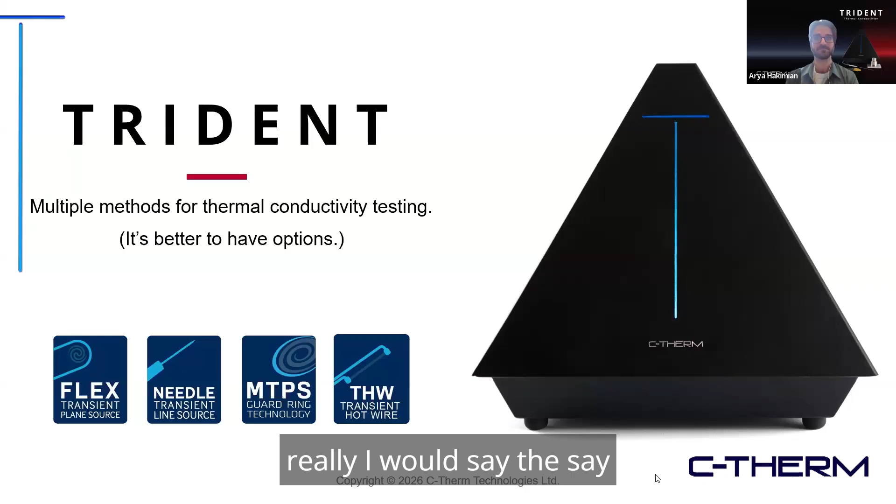Today's webinar is more focused on the TMA aspect, which we also support, but our core is centered around thermal conductivity. If thermal conductivity is also of interest, wanted to let you know about our Trident instrument. This is a modular system which brings together 4 different methods for thermal conductivity characterization. The idea is, being more flexible, being able to pivot into a different method or sensor type based on your materials or application really gives you the highest chance of success at getting good quality data. The idea behind Trident, and a bit of the inspiration, comes from this famous quote from Abraham Maslow: when all you have is a hammer, everything looks like a nail. So again, with Trident, it gives you more of a toolbox approach to really pivot and tackle using the most appropriate method given your specific task at hand.

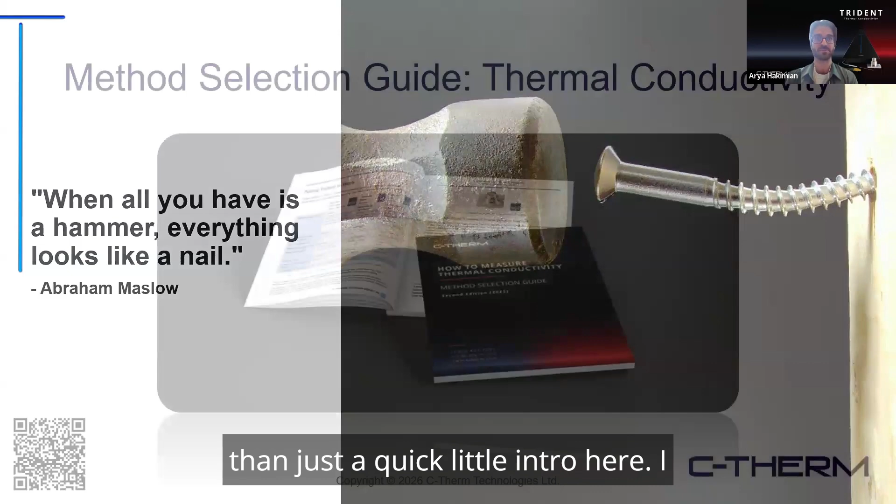So again, we won't be focusing much on thermal conductivity here today, other than just a quick intro. I'll just make reference to our method selection guide. This was recently published towards the end of last year. If you are interested in thermal conductivity and wanting to learn a little bit more about this space, this is a great free resource to check out. It compares a lot of the standard methods that exist out there in industry, as well as some of the more novel use cases and applications. So definitely feel free to check that out if thermal conductivity is also important to your research.

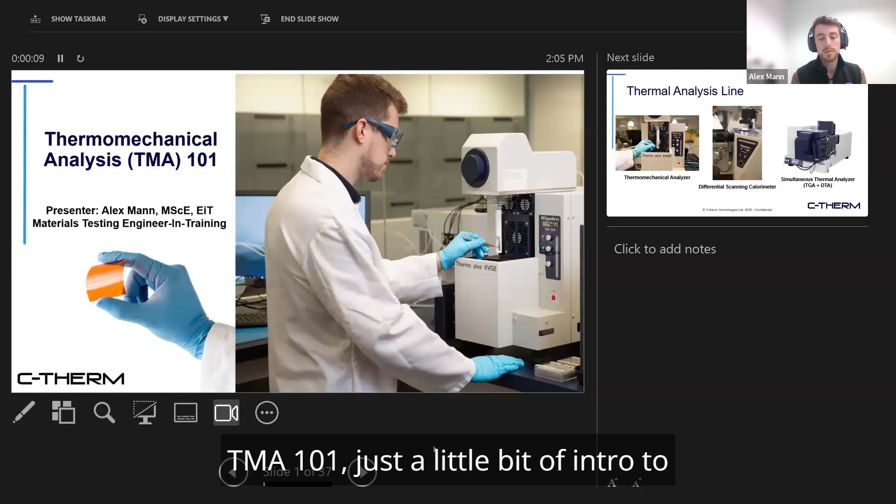So, as Arya previously mentioned, my name is Alex, and I'm going to be going over TMA 101. It's just a little bit of intro to TMA, about the instrument, the test, and what kind of data you can get from it. So, starting off, the TMA is part of a thermal analysis line, which is commonly associated with a DSC as well as the TGA or DTA.

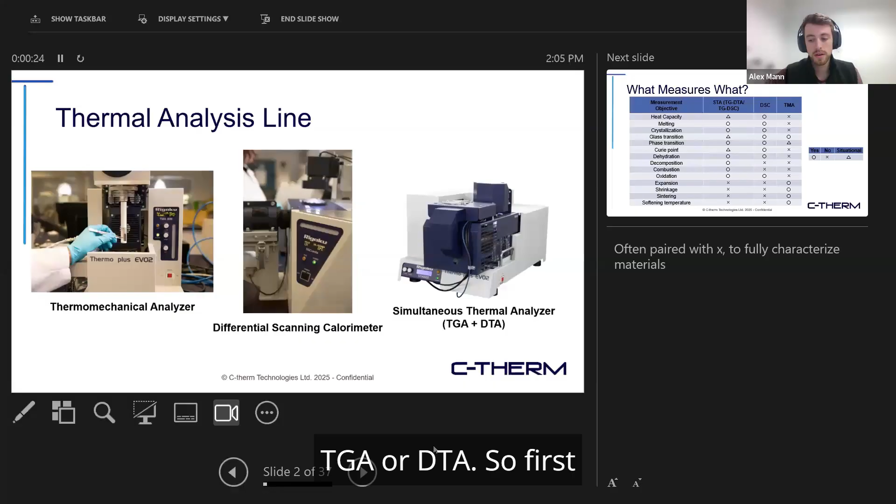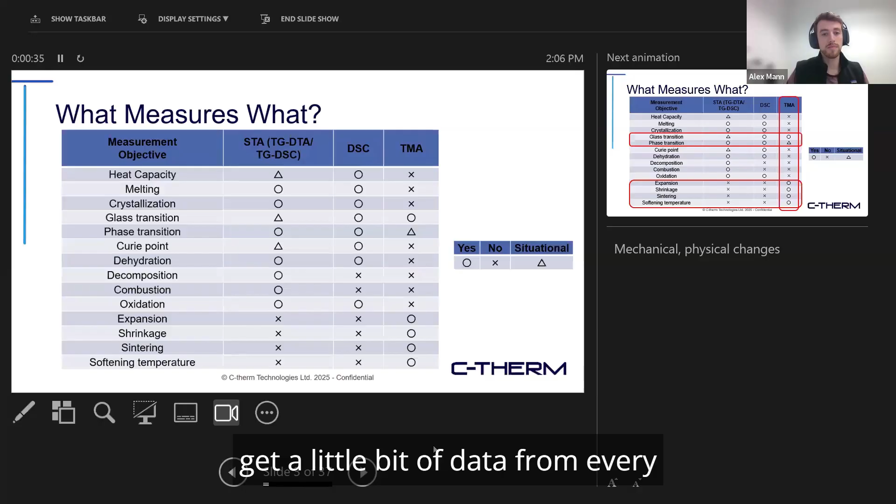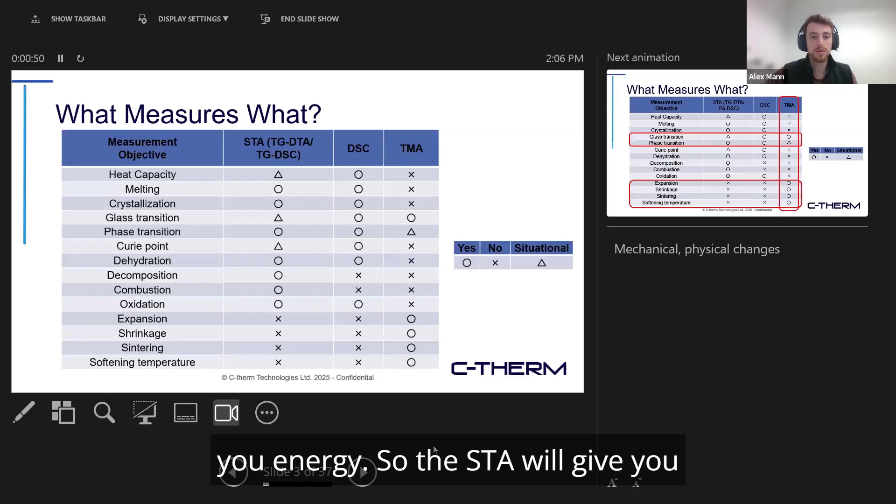So, first off, what measures what? All these instruments are complementary to each other. So if you really want to understand your material, it's great to get a little bit of data from every single one. Starting off, our STA, which is our simultaneous thermal analysis, that essentially combines a TGA, thermogravimetric analysis, as well as either DTA or DSC, which gives you energy. So the STA will give you mass loss and energy.

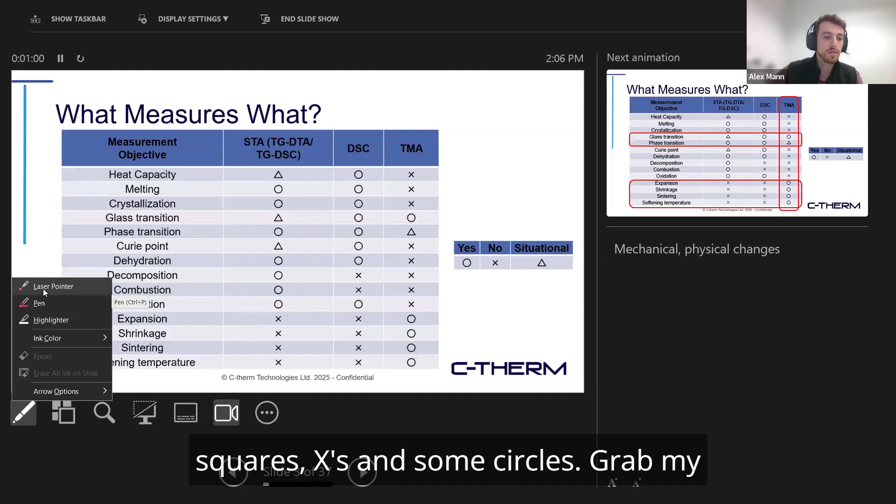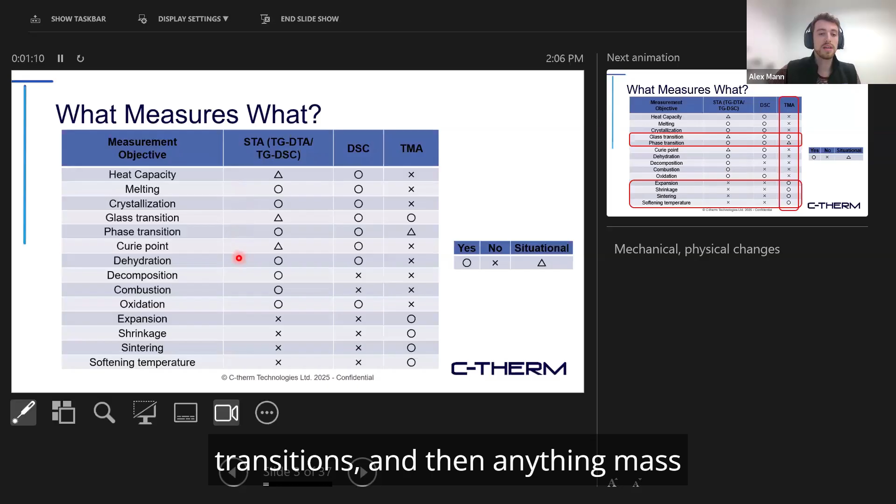So you can see here we have some triangles and some X's and some circles. Let me grab my laser pointer. We can go down a little bit. So the STA can be good for energy events such as melting, crystallization, any phase transitions, and then anything mass related, such as dehydration, decomposition, combustion, or oxidation.

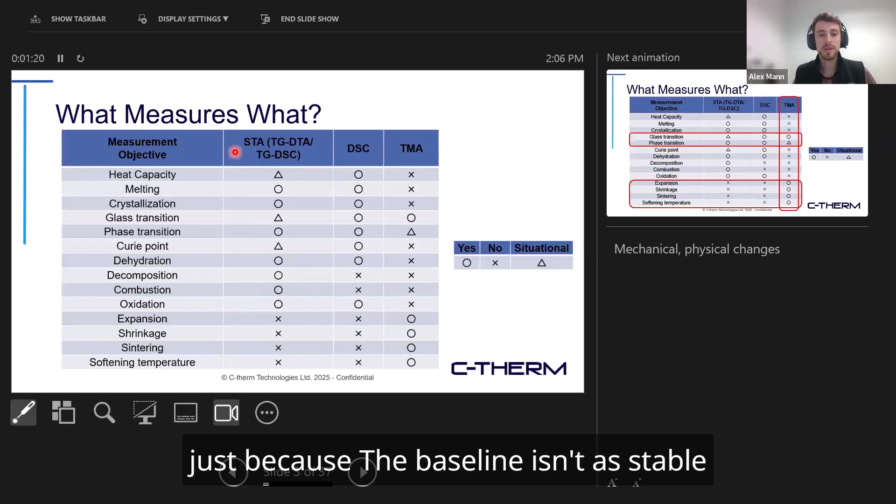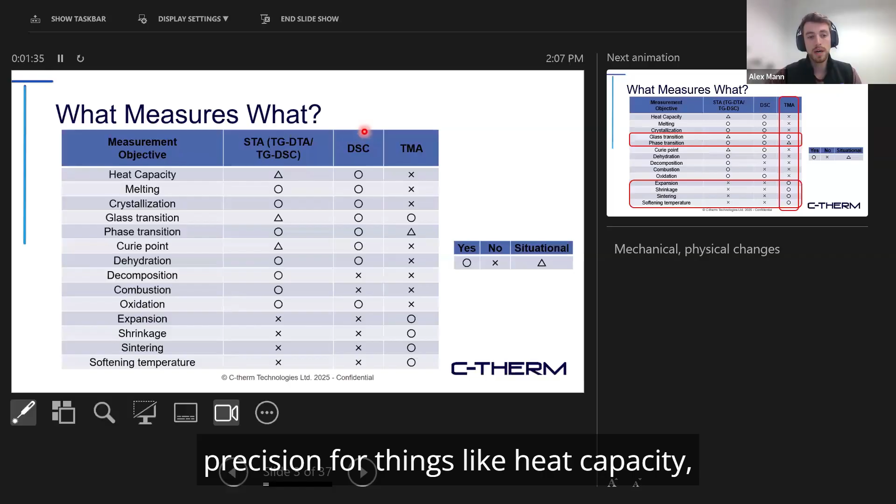Now, we do see some situational marks here, and that's just because the baseline isn't as stable as a true DSC. It's just the way that the furnace is built, and there's a lot more area in the furnace. There's not a stable floor in a TGA DSC, so that's why these are very situational. If you really need the exact energy precision for things like heat capacity, Curie point, and glass transition, then the DSC is much better for the job. This can do all of the above with the energy very well.

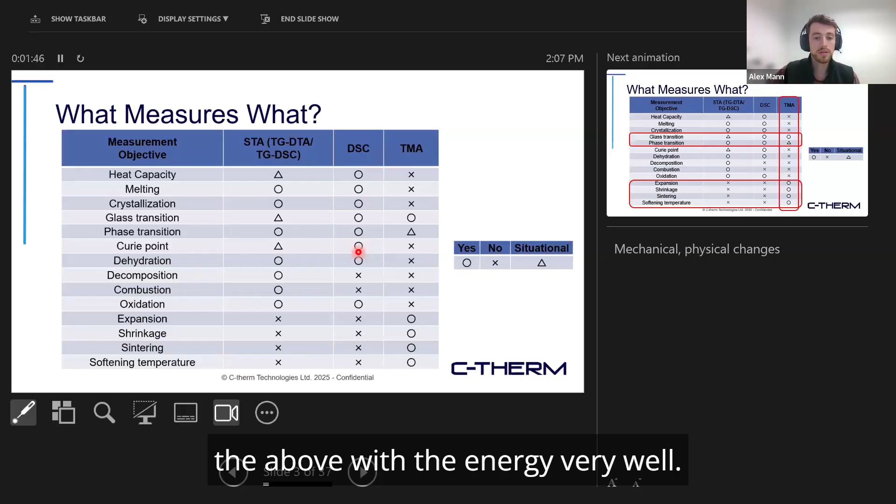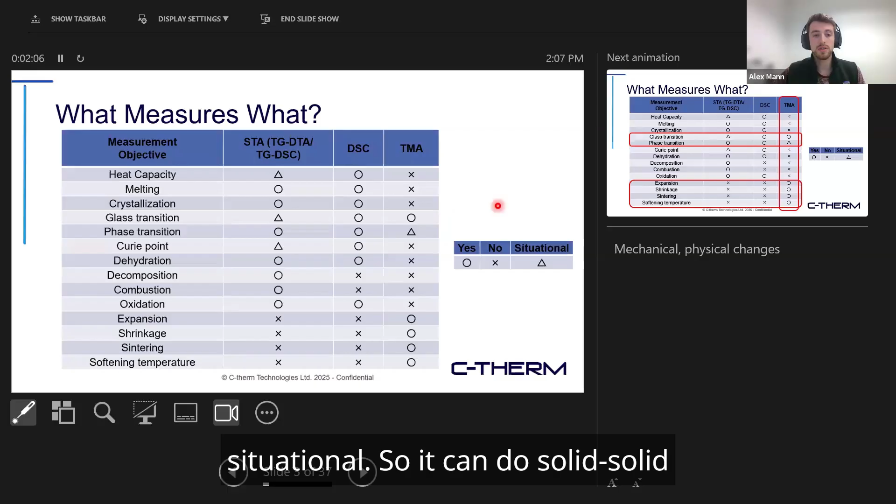And lastly, the TMA measures expansion. That can be from a glass transition. It can just be regular expansion, shrinkage, sintering, or softening. It is a mechanical, or physical property. And lastly, for the phase transition, there is a situational case. It can do solid-solid transitions, or if you're working with a compound such as a rubber, where a small percentage of it will go from liquid to solid, it can do that as well.

But it's not very useful. It's not meant to do full phase transitions such as liquid to solid or solid to gas.

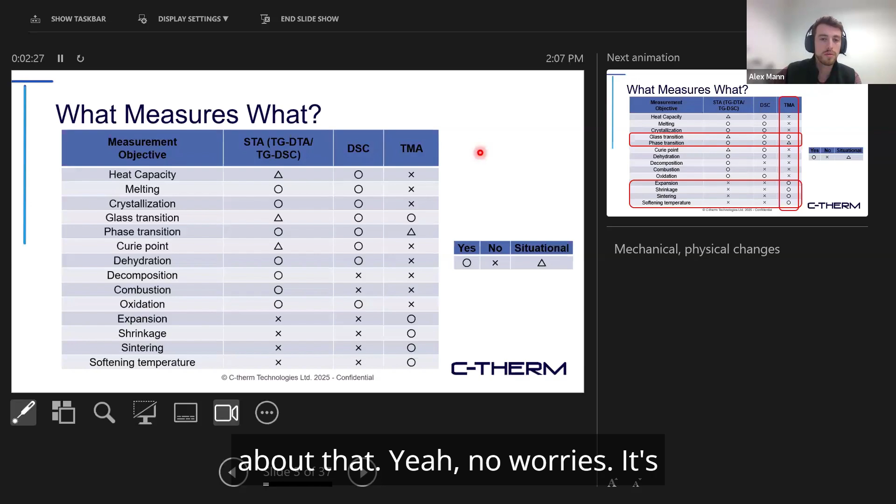Alex, sorry to interrupt there. I just want to flag you're in presenter mode, that's what's being shared. Just wanted to let you fix that. Oh, sorry about that. No worries, it's happened before and I'm sure it'll happen again. I'm gonna fix that real quick. All right, is that better? Looks good, thank you. Thank you for that, sorry about that everybody. Happens to the best of us. Technology, am I right?

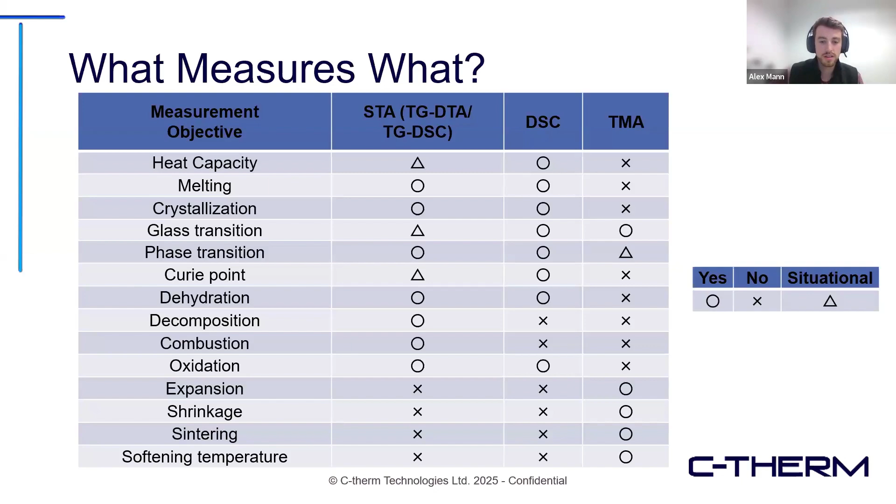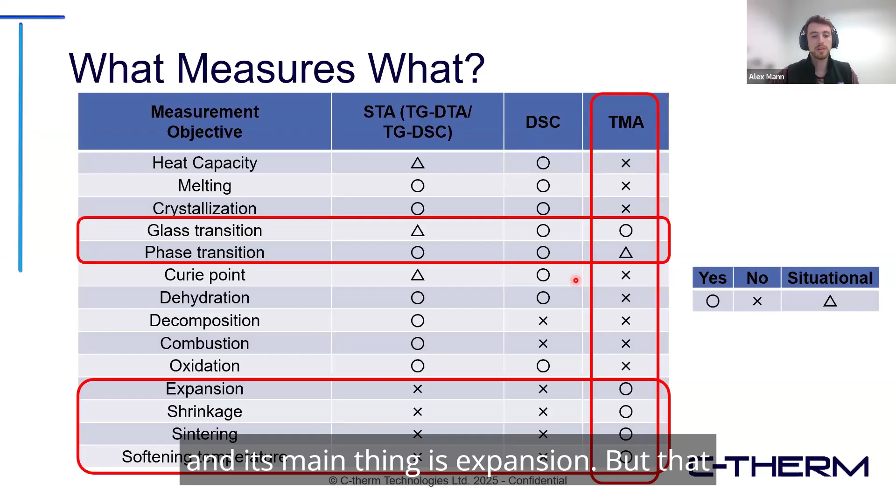All right, so TMA is good for glass transition, some phase transitions. Its main thing is expansion, but that also includes shrinking from sintering, and because it is a physical technique, it can also measure the softening temperature.

So I'm going to be going over CTE a lot, which is an acronym for coefficient of thermal expansion. I'd like to go over that real quick so we're on the same page. This is just a term we've come up with in order to describe how a material will expand or shrink over a temperature range.

So the units of CTE include micron per meter Celsius, parts per million per degree Celsius, or e to the negative 6 per degree Celsius. I personally choose ppm per degree Celsius because the rest are a bit of a mouthful.

Whenever we do our CTE, we need a reference point, because we're expanding from where? We need to define this. So as we can see here for our formula, our CTE is essentially our expansion as a percent divided by the change in temperature. So on an expansion chart, it'll look like this - it's going to be the slope, rise over run.

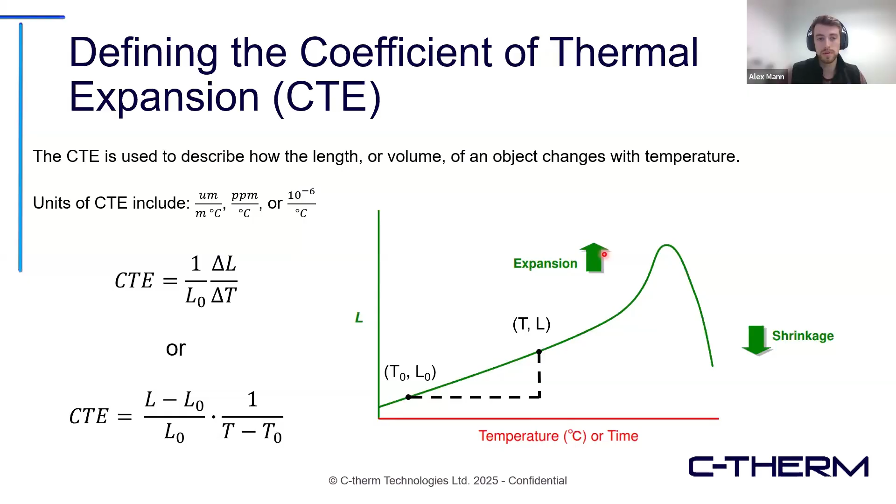So why is CTE important? Why is it necessary, why do people require it? Well first off, it's always good to know how your material is going to behave over a different temperature range. You can use it to get your material's density as a function of temperature. Density is very important for any simulation, modeling, or even just calculations.

Thermal expansion can lead to unwanted stress, failure or warping, delamination, things such as that. So it's really good for determining the compatibility and limits for when you're pairing materials. We have a little visual here with two different materials at room temperature, but then when you chill it or bring it up to temperature, we see that they're not compatible and there's some delamination and/or warping.

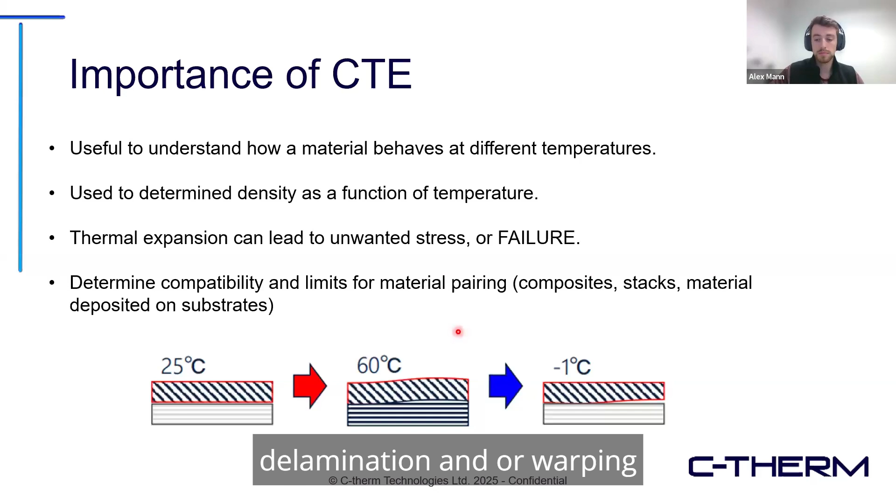For brittle materials, you can get thermal shock, which can cause cracks or plain old failure. So when rapidly or even unevenly heating materials that are brittle, it can cause one part to expand, which then can crack because it's very brittle - it does not want to expand much before breaking. This is very important for ceramics and glasses because they are susceptible to thermal shock. So if we lower the CTE of these materials, so if they expand less, then there's less chance of them breaking, cracking, or failing.

A great example of this would be cookware. So if you have your ceramic cookware or glass cookware inside the oven at 150 Celsius, you want to be able to take it out and let it cool on the counter at 25 degrees Celsius without getting any cracks or it shattering.

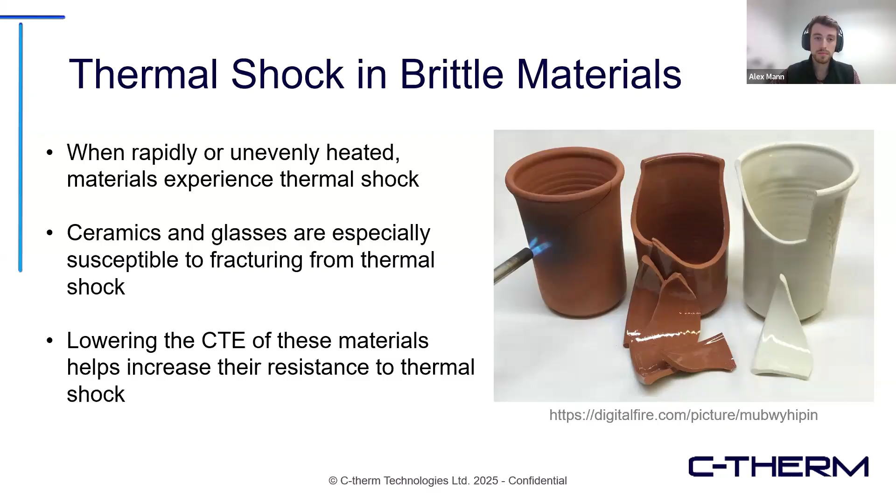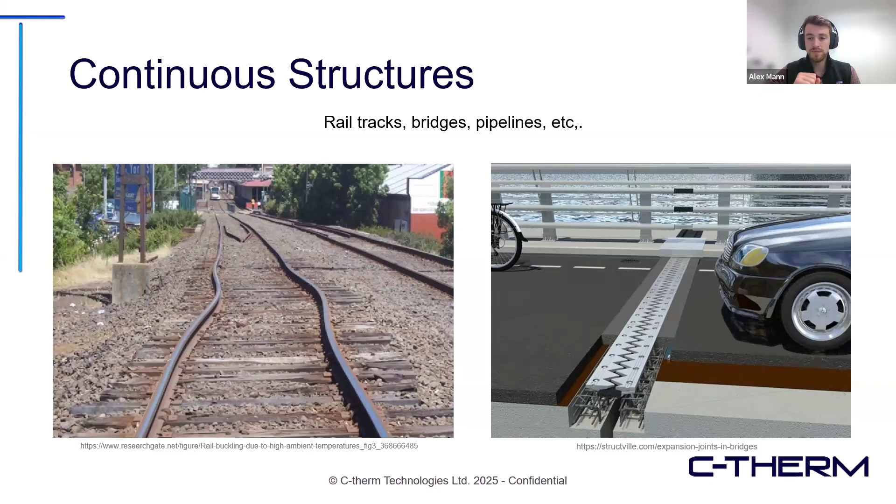Something else to think about is for continuous structures such as rails, bridges, pipelines. I mentioned that it's based on the initial length - that's how we determine CTE. So if we have these really, really long structures, they're going to expand by a lot. So sometimes expansion joints or other things can be implemented in order to prevent any failures for these types of structures.

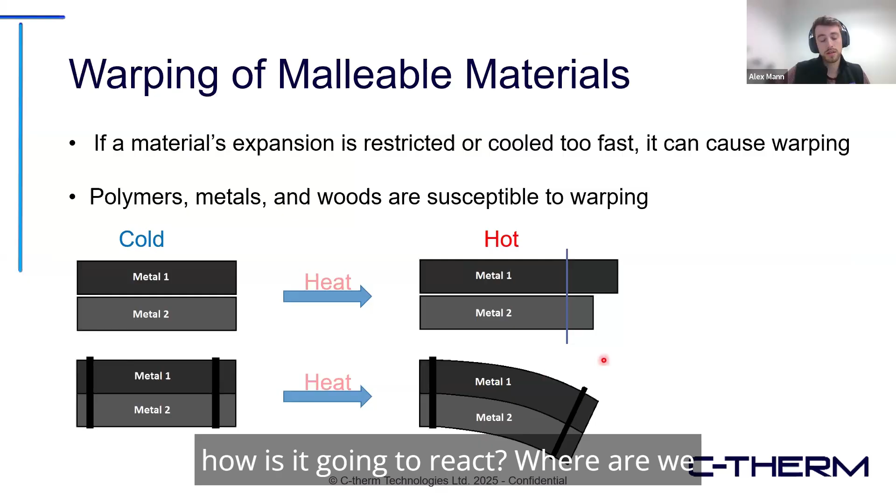There's also warping to think about. So if material expansion is restricted, or if you cool it too fast or heat it up too fast, there can be warping. We see this in polymers, metals, woods. We have a nice little schematic here where we have two unrestricted metals, and when we heat it up, one expands a little bit more. However, that begs the question - if we were to restrict them, how is it going to react? Where are we going to see some warping? In this scenario, we will.

Now, what if we combine a brittle material and a ductile material? A great example would be vacuum tubes, light bulbs, reed switches, diodes, where we have a metal attached to a glass. As I mentioned, glasses want to have a very low CTE, metals will have a little bit higher. So you have to well align the two so that when you create it, when you melt the glass and combine it to the metal, it can cool off without causing a large stress on the glass, which can result in breaking, cracking, or even failure.

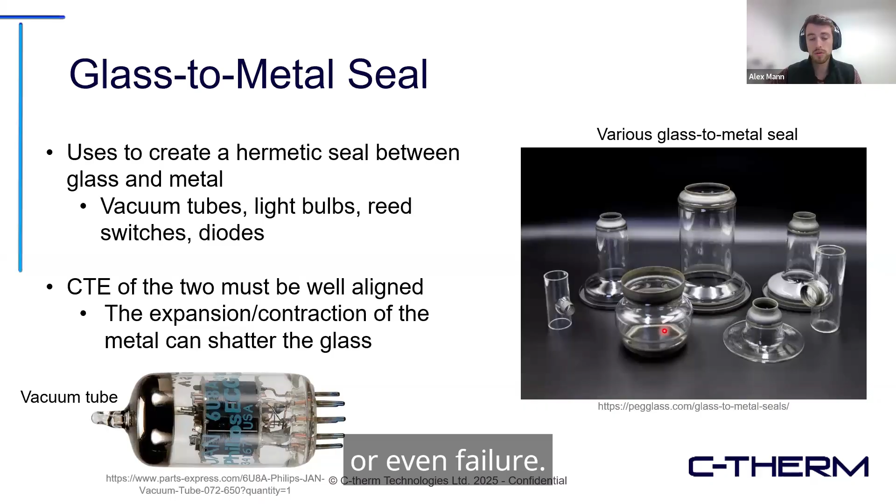So let's go into the TMA instrument and how to run some tests, what you need to look out for.

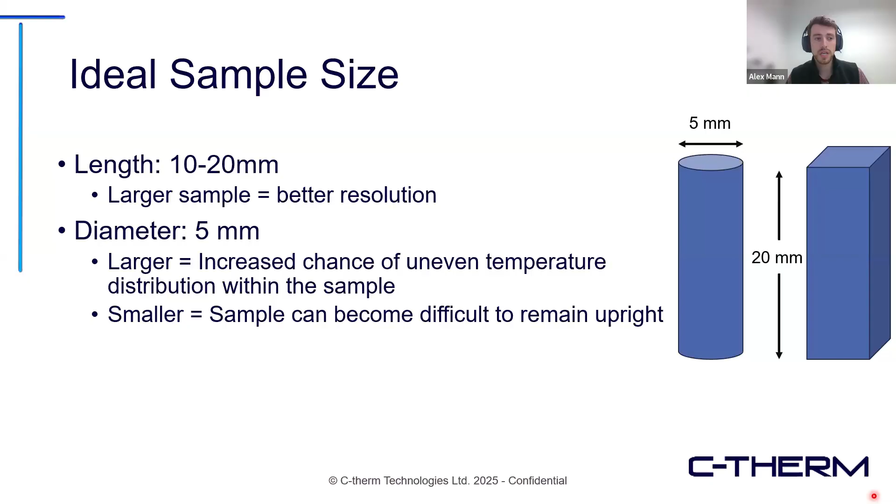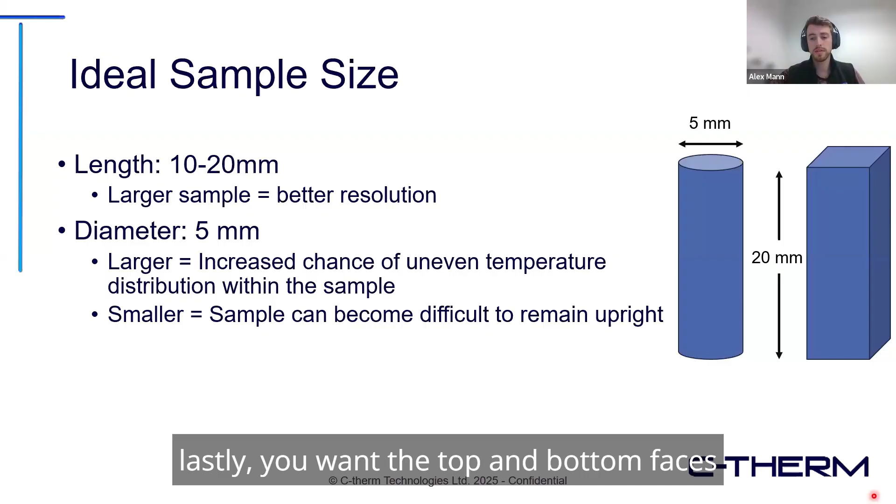Something else to consider is the diameter of the sample. If our sample is too thick, we can cause a large temperature gradient within it, and we want to avoid that. If the sample is too thin or narrow, it has trouble standing up on its own. Lastly, you want the top and bottom faces of the sample to be flat, flush, and parallel, so the sample isn't crooked and the rod doesn't slip or slide.

There are two types of compression TMA: compression, regular or non-differential, and differential. The biggest difference between the two is that one has two rods and the other only has one. The reason for this is that with a second rod, we can simultaneously run a reference sample to get better results. I'll go over that in a sec, just after we cover the rod types.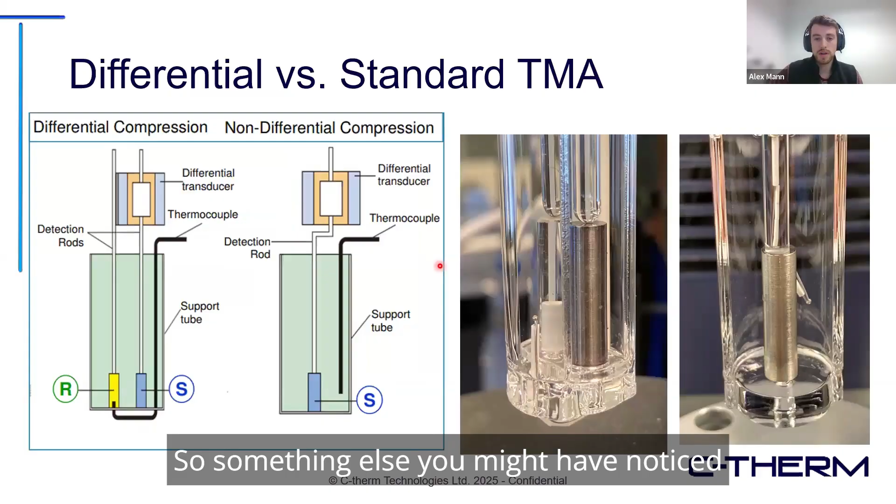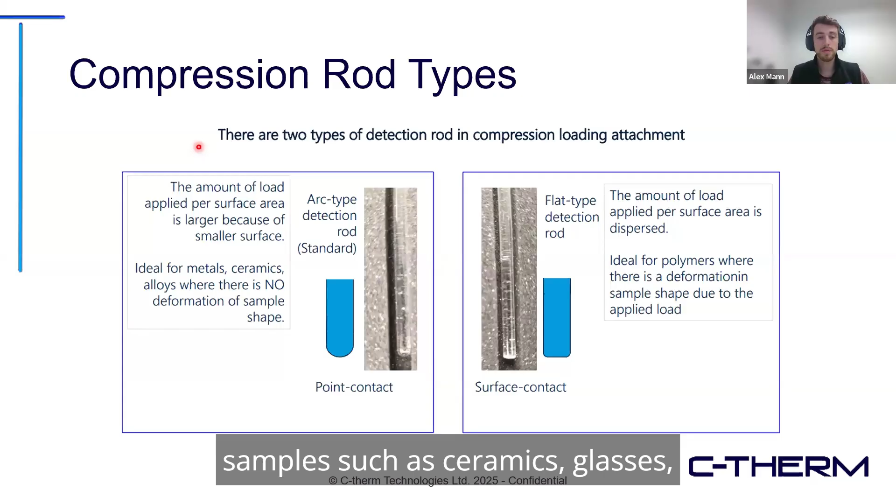Something else you might have noticed is that this rod is arced and this one is flat. For the arc type rod, it redirects all the force into a single point, so the pressure on the sample is greater. This is good for samples such as ceramics, glasses, and metals, where the force isn't going to cause the sample to buckle, or as it heats up, the sample won't get soft and let the rod penetrate. We want to avoid that, so that's why we use an arc.

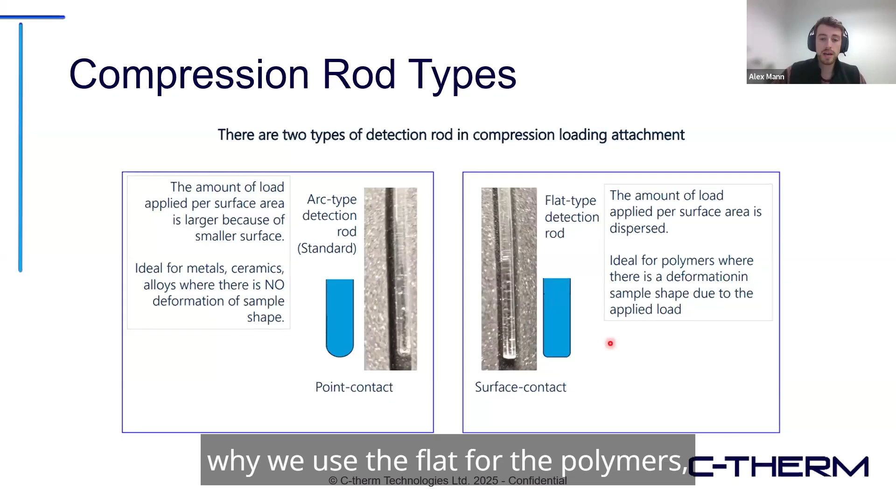However, if a sample is a polymer, as we heat it up it runs the risk of getting soft. At some point the polymer's viscosity will take over and the rod will start to enter the sample, giving an error. That's why we use the flat rod for polymers, because it distributes the force over a larger area.

For the single rod, here's a bit of theory. We have our observed expansion - this is what the instrument records or measures. It measures expansion but doesn't know where it's coming from. So in reality, it measures the expansion of the support pipe, the sample, and the detection rod, which causes some error. However, it's made of quartz, which has a very, very low CTE. So when measuring something like a polymer, the error caused by the detection rod and support tube is negligible, because polymers can have CTEs on the order of 200, 300, 400.

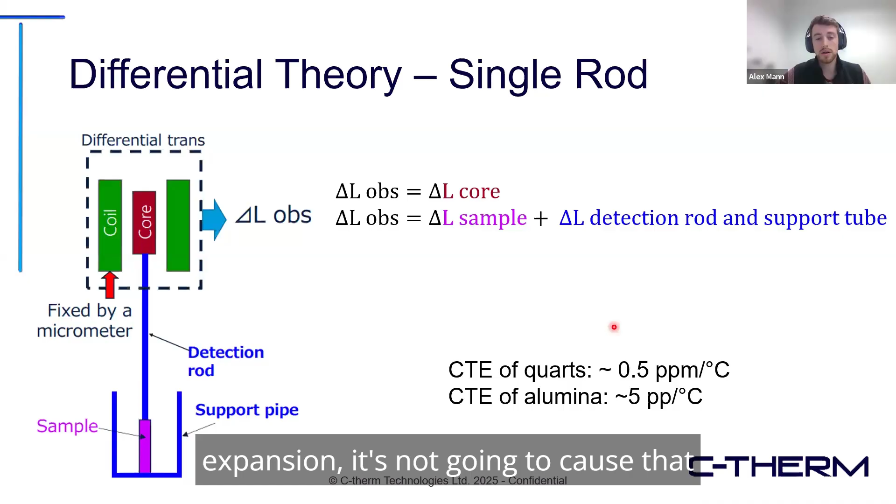Now, if we're measuring something like glass, metal, or ceramic, which has a much lower CTE, say in the range of 2 to maybe 30 ppm, we're going to see quite a bit of error due to the expansion of the setup itself.

The way differential theory works is that we have the coil and the core connected to each other. When the reference sample pushes up on the coil, it takes the core with it. So the coil measures the reference, then the core measures the sample. Our observed value is the core minus the coil. Because each of these terms includes the detection rod and support tube, when we expand them out, we're left with the observed expansion being the sample minus the reference.

Now, this is what we're measuring, and because it's a reference sample, we know what its expansion should be. So whenever we subtract it, we can get a really accurate expansion using this differential system. Think of it as you're measuring a blank or a reference simultaneously as the sample you're measuring.

Now, the big advantage of this is obviously that it's needed for non-polymers, such as glasses, metals, ceramics, things that have a medium to low CTE. It's also really necessary for TMA at the temperature extremities.

So most people like to use the term coefficient of linear expansion. That's not entirely true. The material's expansion doesn't tend to be exactly linear. As it gets warmer, it tends to curve upwards, and as it gets colder and colder, it tends to curve a little bit downwards.

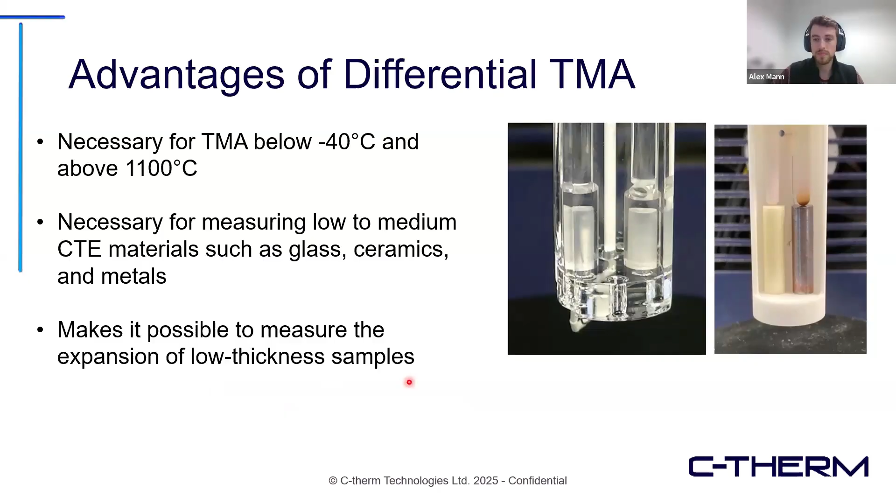So here's an example of the differential stage method that I just mentioned. It's used for samples that are less than 10 millimeters. What we do is we have our reference sample, and then having another material that is the same as the reference sample, we call it the stage, and that's what we prop our sample on.

Now, because these two are the same material, we can cancel out the expansion of the stage because it is a reference material. We know how much it should expand. And then we can get a really accurate result for this low thickness sample.

So this is great for pellets, sheets, pills, wires, things that are just naturally small. If your sample is hard, you can't shape it, or sometimes when you're doing a synthesis of a new material, you can't really make that much. So being able to reduce the sample size and measure these small samples is very helpful.

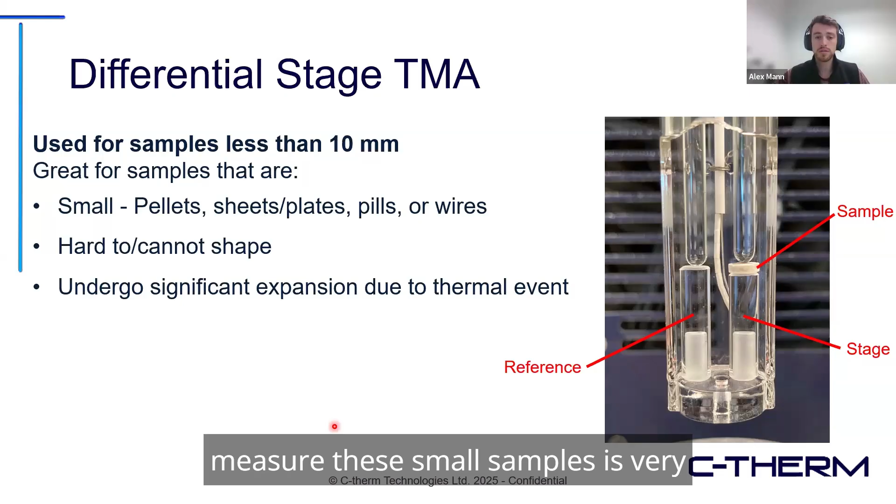Something else to consider is that if we have a multi-layer sample, we can use this technique to isolate one layer and get the expansion of just one layer. So we use a differential method, and we use a reference material that is identical to the substrate.

And in doing so, our substrate now becomes a stage, and then we can isolate or take away the stage's expansion, and then just get the expansion of our sample.

Now, one thing with this is that if you remember, a larger sample gives better resolution. So if your deposited sample on a substrate is very, very small, like in the micron range, well...

if we're measuring 1% of something in the micron range, we're not going to get a very big expansion, and you're not going to get very good resolution.

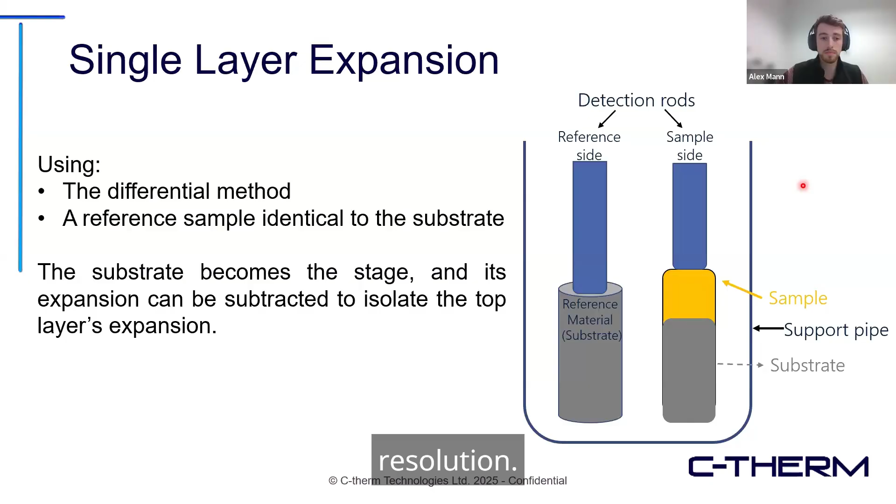Something else to consider is that for those who are familiar with DSC, TGA, STA, you'll realize that the TMA sample is much, much bigger. So when you're using these other methods, you'll often use 10 to 15, 20 milligrams of sample.

While in the TMA, we have this large, 20 millimeter tall, 5 millimeter thick sample. So thermal inertia can cause the sample's temperature to lag behind that of the furnace thermocouple because we're using such a big sample.

We don't want this happening inside of our TMA run, because what happens when the outside is undergoing glass transition and the inside isn't? Well, then we can get some delayed values or some weird stuff going on.

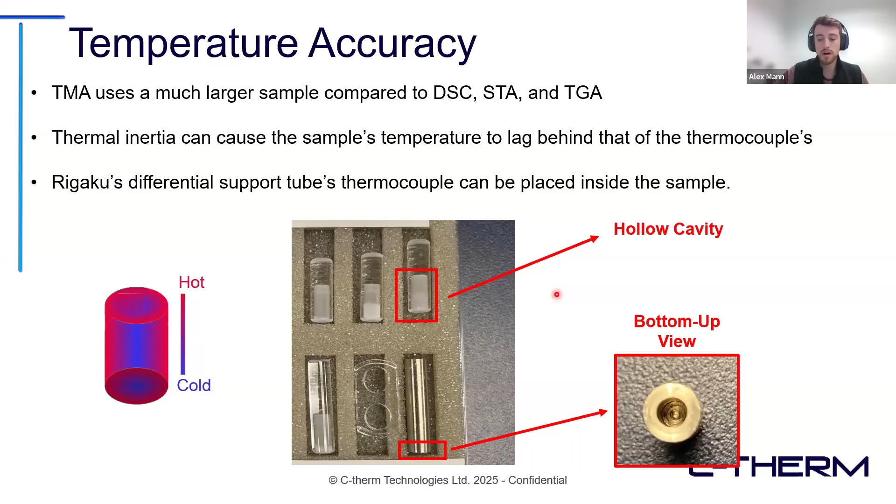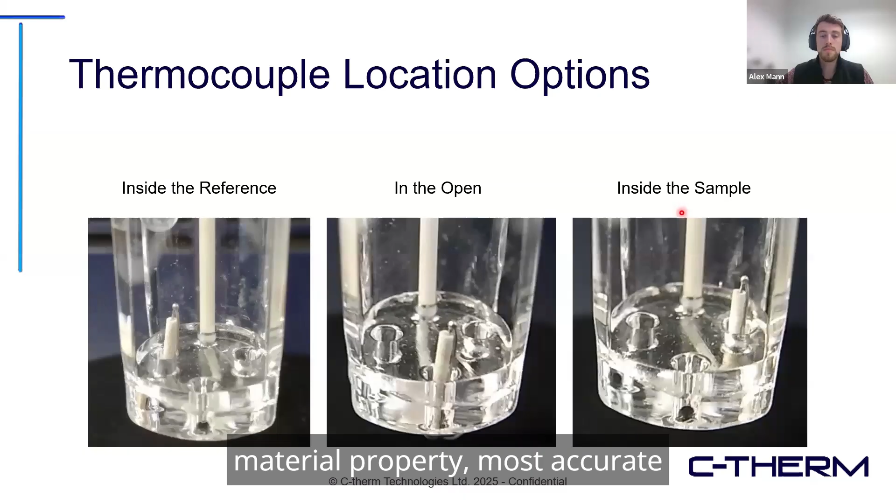So then, as I mentioned, you can stick the thermocouple inside the reference. If you're unable to actually burrow into your sample, then you can use the reference sample to mimic your actual sample. If you just want it out in the open, maybe you want to represent your own process or different conditions, you can have it in the open. Or if you want material property, most accurate temperature, you can then stick your thermocouple inside the sample.

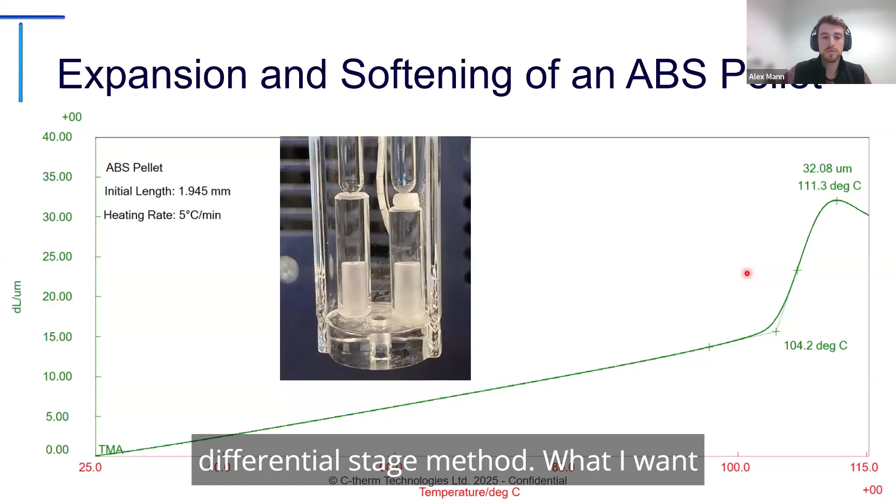So this is an example of the expansion and softening of an ABS pellet using the differential stage method. What I want you to look at here is this dilatometric softening point. Eventually, the ABS pellet becomes so soft that the force applied by this rod actually begins to penetrate and enter the ABS pellet.

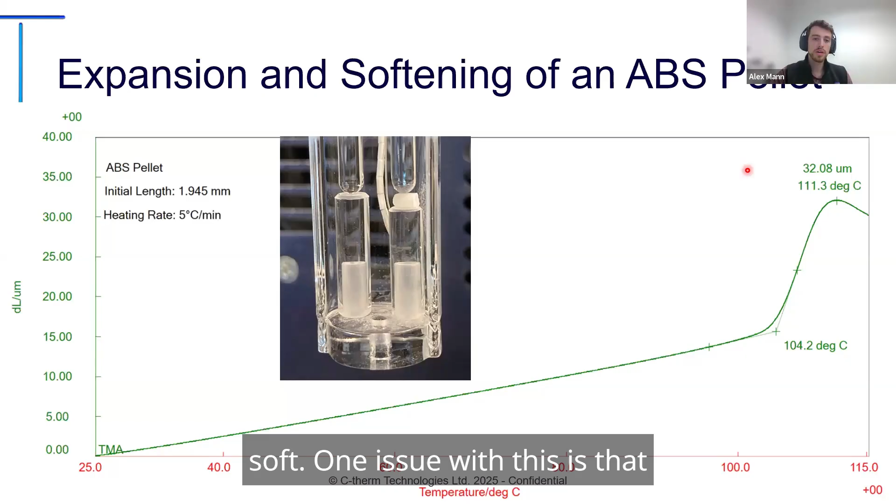This isn't inherently an actual event because a pellet like this won't shrink. It's just an inherent thing that the TMA records. And that's not a bad thing because you can use this dilatometric softening point to gauge at what temperature your sample will become soft. One issue with this is that if you go too high and your sample melts, or if you enter the sample too much, it can fuse to the support tube, it can fuse to the rod and damage your setup. So essentially what you can do is you can set a meltdown protection in the software.

So here it's set to -10 microns. So we're going to measure our run. We're still going to get the softening point, but then once it reaches this -10 drop, it's going to auto stop the measurement.

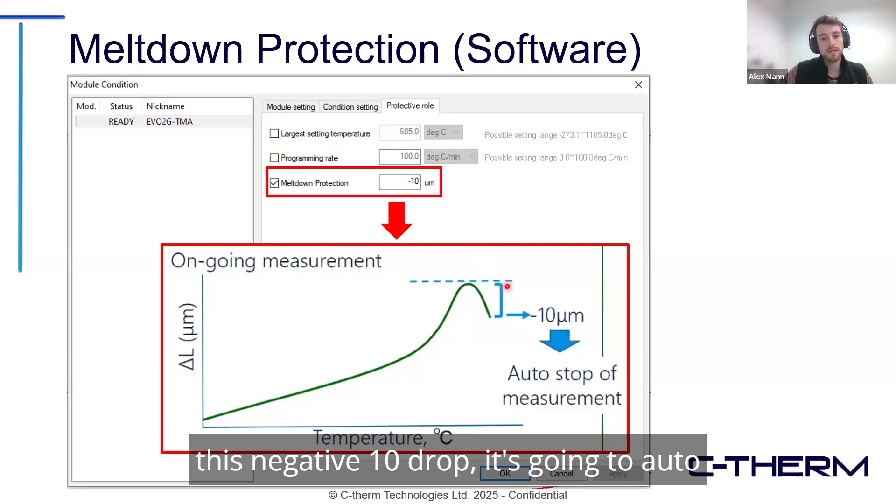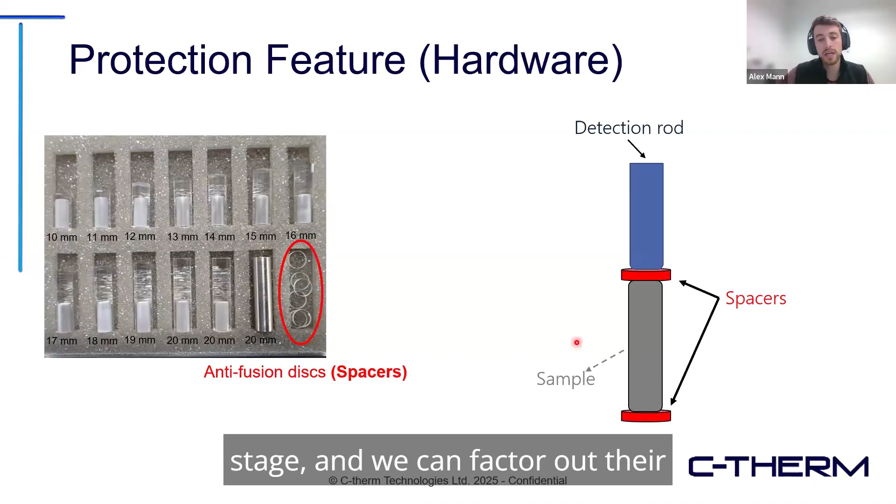And then there's also the hardware version you can use where you can use anti-fusion disks or spacers. These are just sacrificial pieces that you can put above and below the sample. So if it does melt, it'll stick to these spacers instead of the detection rod or the support tube. Because these spacers are made of the same material as our reference samples, quartz, these can be counted as a stage, and we can factor out their expansion so you can keep really accurate results during this.

Now, we can combine all the above to temperature check our TMA or our thermocouple. So what we can do is we can have the spacers, a tiny little bit of reference metal, and then our stage — using the differential stage and our spacers. And we can just heat it up until the reference metal melts.

Because it's crystalline, a very sharp melt, this won't become soft until the actual temperature that it melts. So we can see here this was done with indium, which melts at 156.6. And we saw the big drop — this is where our rod will essentially squish the now liquid indium at around 156. So we can say that our thermocouple inside our furnace is working as planned.

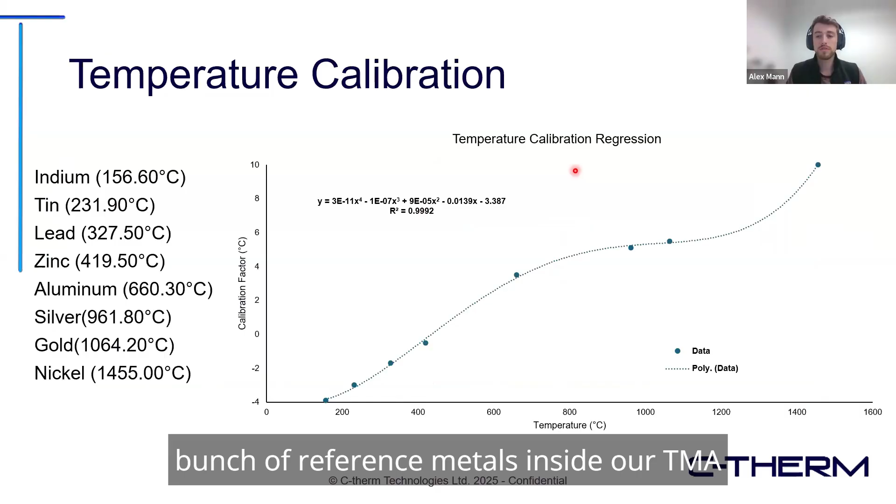Now, what if you do this and you get a really bad result? Something's far off. Well, we can melt a bunch of reference metals inside our TMA to create a temperature calibration so that we can recalibrate the thermocouple so that it is once again accurate. So here are some examples of some very common reference metals: indium, tin, lead, zinc, aluminum, silver, gold. So this kind of covers the entire low to high temperature range.

And depending on the range you are using, it's good to use at least 3 reference metals, but the more you use, the better you get for a curve. So essentially, our calibration factor would be how far off your thermocouple is from the literature value. And what we often see is an upward slope like this, and then at one point it's okay. So then using this, you can recalibrate your thermocouple to get the highest accuracy results.

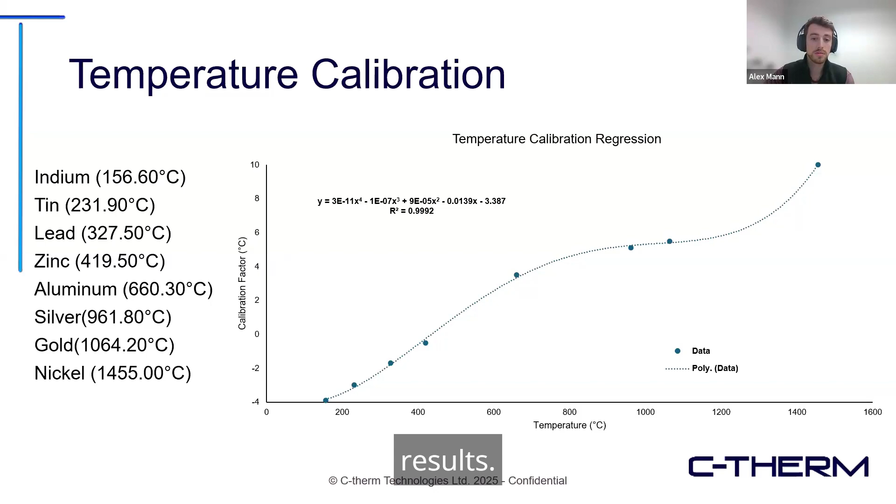Something else that is often overlooked for TMA is that it can actually do thin film expansion as well. With a thin film, we can't use our typical compression because the foil or film will buckle. So instead we do tensile loading. We get a new detection rod, but this one has a little clip on it that pulls the sample upwards in tension.

This is good for polymer films, metallic foils, fibers, fabrics, and wires. The thickness is around 10 to 300 microns, and the lower limit is sample dependent. If we have a very weak sample that can't withstand the clamping force, sometimes 10 microns doesn't work. Or if we have a really slippery sample, like Teflon, it might slip out of the clamps the thinner you go. So the lower limit is a bit material dependent.

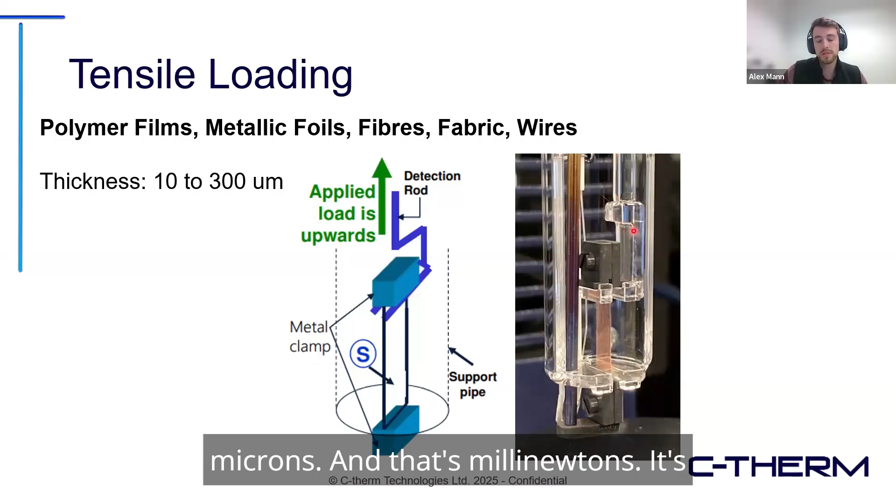Something you may notice is that we have clamps we need to string our sample into. Here we have our footer, which pinches the sample to the bottom of the support tube. We have the sample itself, and our detection rod, which pulls the sample up at a force of around 1 to 1,000 millinewtons. And then we have our sample clamps.

A thin film mounting jig is used to get the sample inside the clamps. As you can see, when measuring 15 millimeters, you need a bit of a bigger sample because the clamps will take some of it. Essentially, you insert your lower bracket and spacer, next you put your sample in, then you put the top on and clamp it shut.

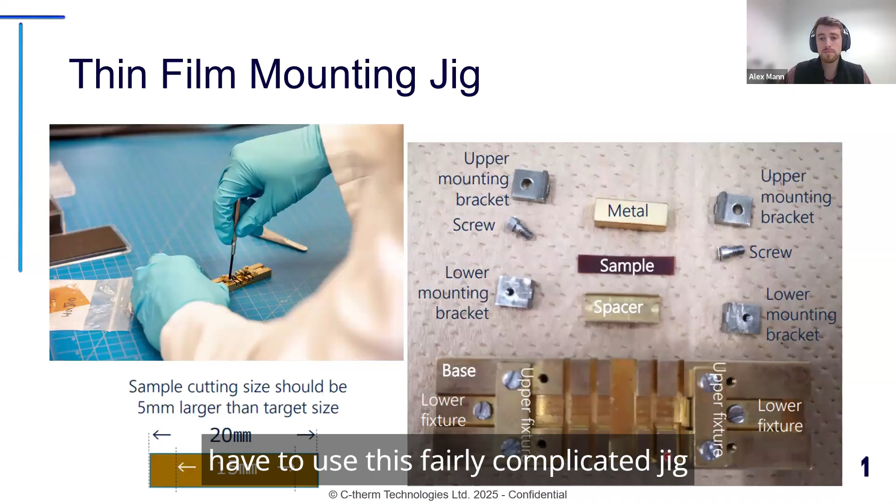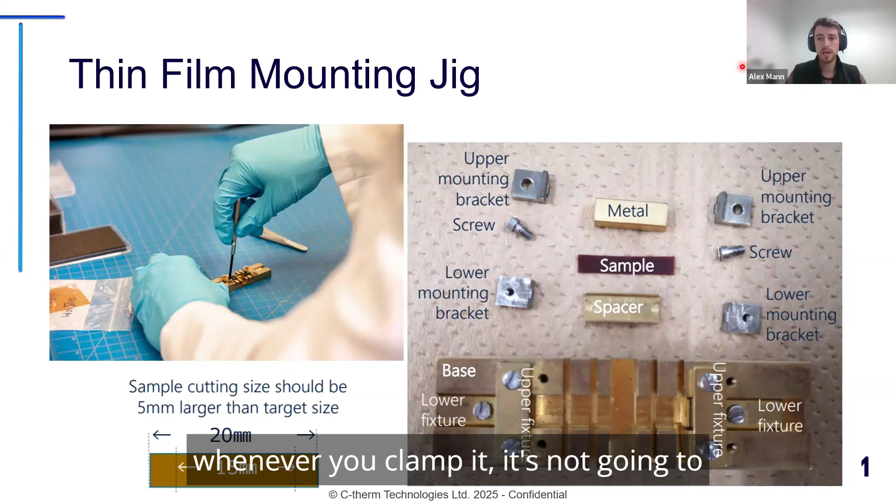The reason we use this fairly complicated jig and mounting setup is that it's very well machined to be precise, so whenever you clamp it, it's not going to be crooked. It gets the exact right length every single time. These are things that help increase the reproducibility and accuracy of the TMA.

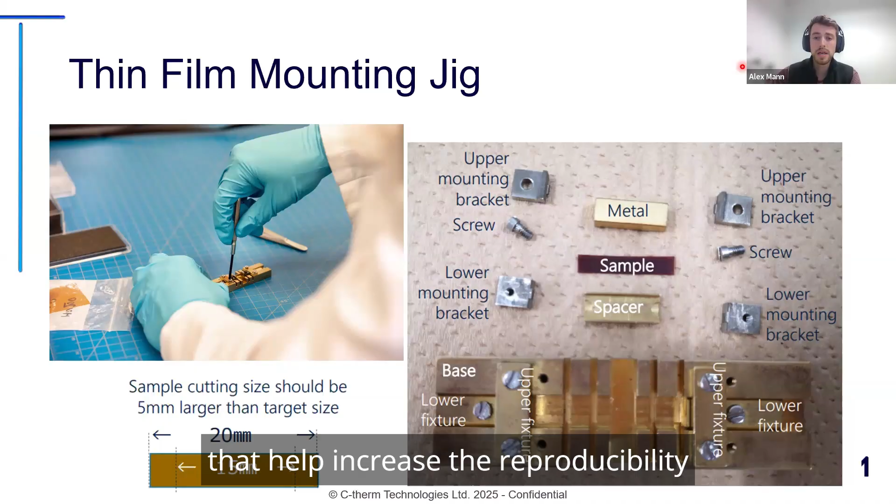Next, we'll go over some data analysis. You have your chart - what do you do with it? First is glass transition.

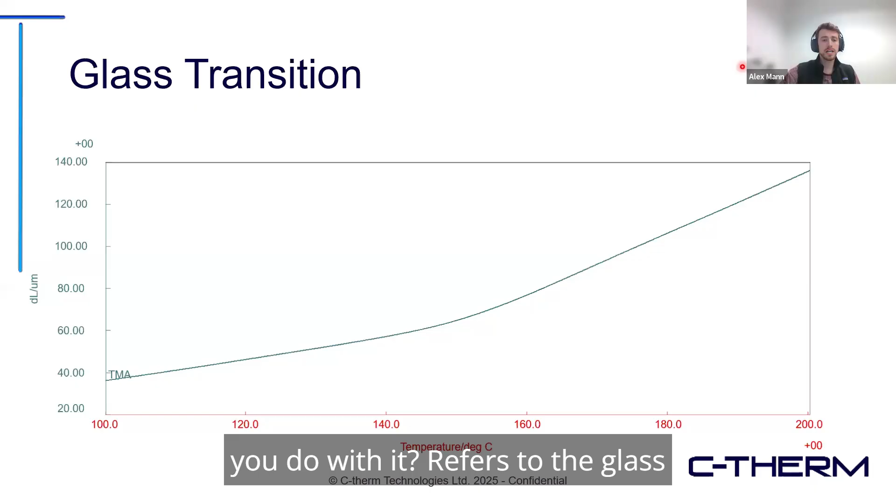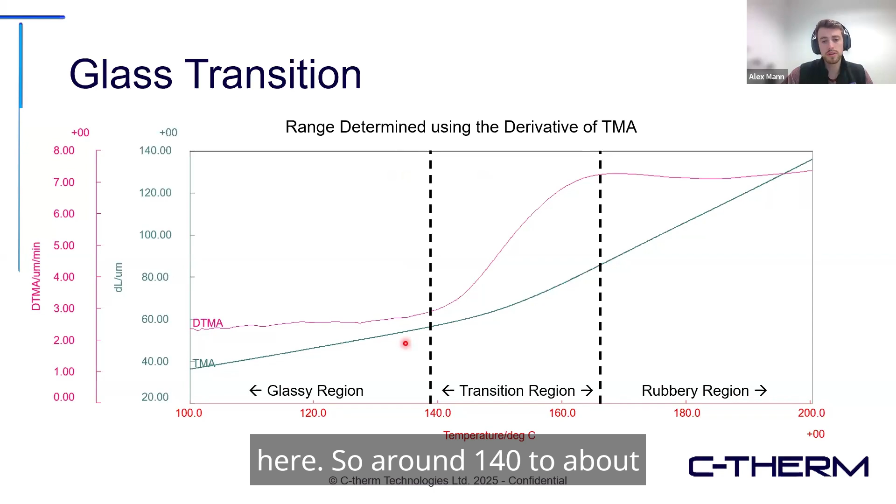This is shown as essentially two straight lines that curve from one to another. You'll have the glassy region, which has a lower rate of expansion, and the rubbery region. If we look at the derivative of TMA, the rate of expansion, we'll see this is a straight line with a relatively constant derivative or slope. As we transition to the rubbery region, the derivative changes until it eventually flattens out again. Using this derivative TMA, we can determine the transition region falls within here, around 140 to about 165-ish.

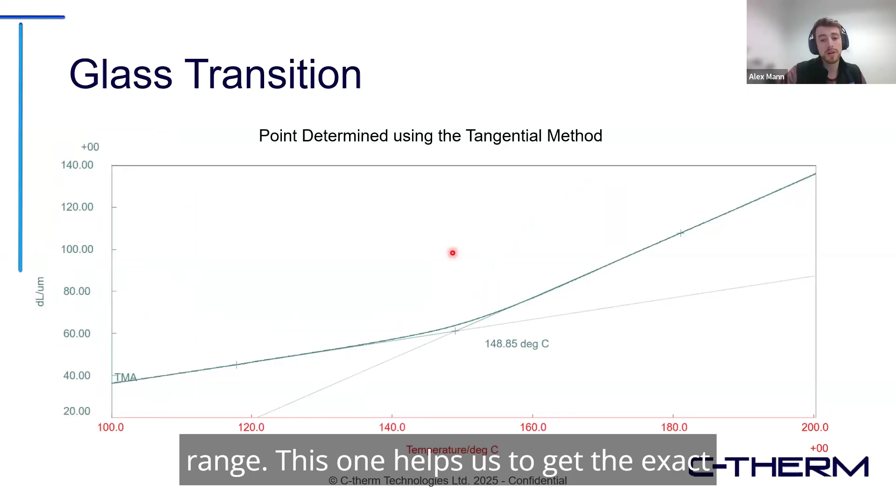Another, more common way to determine glass transition using a point-based method is the tangential method. We take our first line, take the tangent of it, and extend it. Then we take our second line, take the tangent, and extend it. Where these two tangential lines cross, we say that is our glass transition point. The derivative method helps us with the range, this one helps us get the exact point.

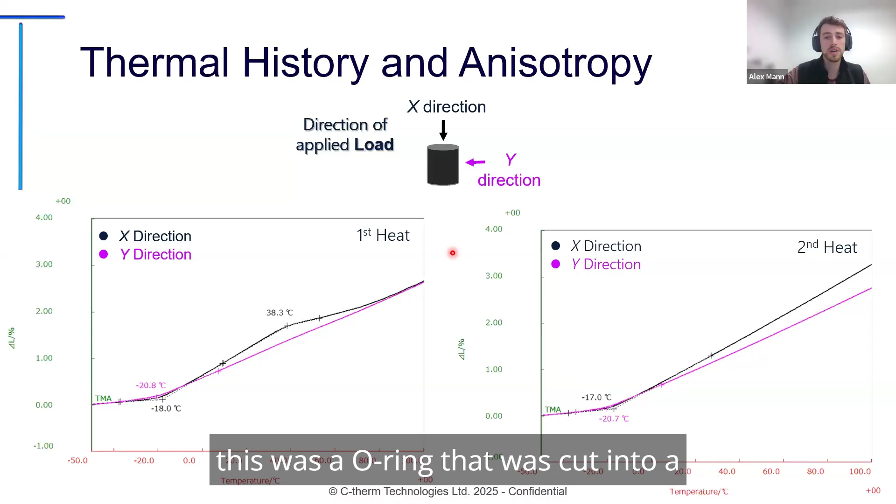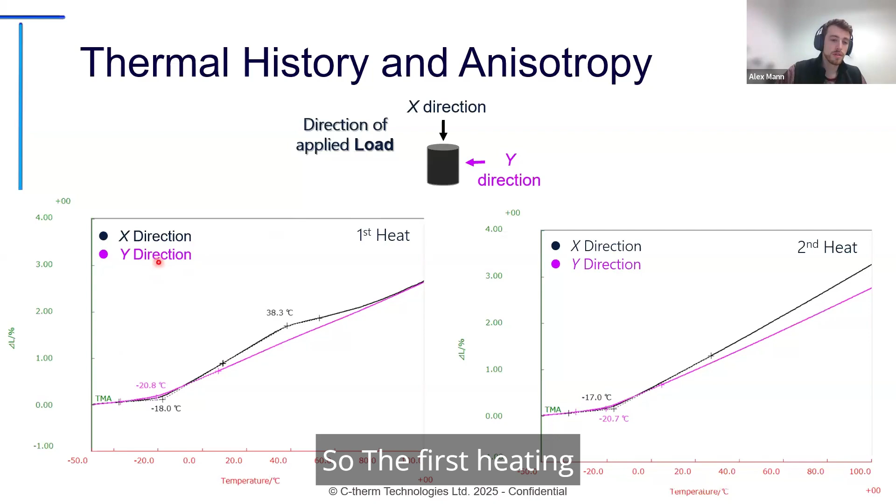Something to consider for materials is always thermal history and anisotropy. This was an O-ring cut into a little cylinder. You notice that in each direction there's a different expansion and different glass transition. In the first heating in the X direction, we see a little arbitrary curve going on here, due to the thermal history from its manufacturing process.

If we do a second heat, you can see it is now straightened out and our glass transition has shifted a bit. So when working with polymers, and sometimes even metals, it's always good to have some sort of process where you heat it up slowly and then slowly bring it back down to temperature to get the most accurate and repeatable results. This is very important with polymers.